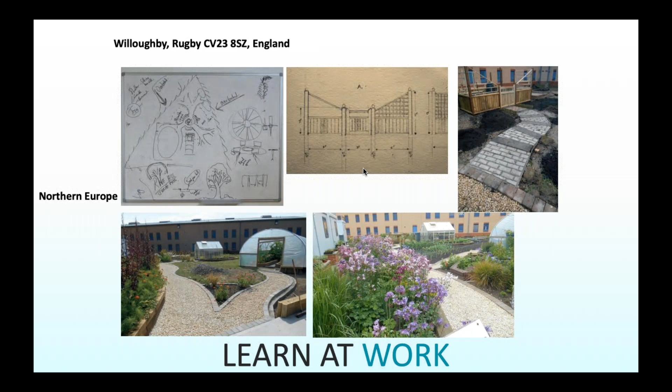Go ahead, Daniel, and I'll just pop in.

They do a lot of cultivation of plant material in East Asia, where it's a very open policy in many facilities—probably medium to minimum security, not maximum. They cultivate food and herbs and make products, engaging with the community. In Thailand, for instance, there's a shopping area open on weekends where trade objects, food, and beverages are sold, all run by inmates as part of a business acumen program, going soup to nuts to complete the entire program.

These are some examples of foreign projects, I believe in Northern Europe, though I'm not sure exactly which country. Do you remember which country this was, Amy? I do not.

Our project was at the Washington Correctional Center for Women, located in Gig Harbor, Washington, south of Seattle. The superintendent is Joe Wofford, and the facility has been around for about 50 years. It houses over 700 women offenders, with minimum, medium, and close custody or maximum areas within the prison.

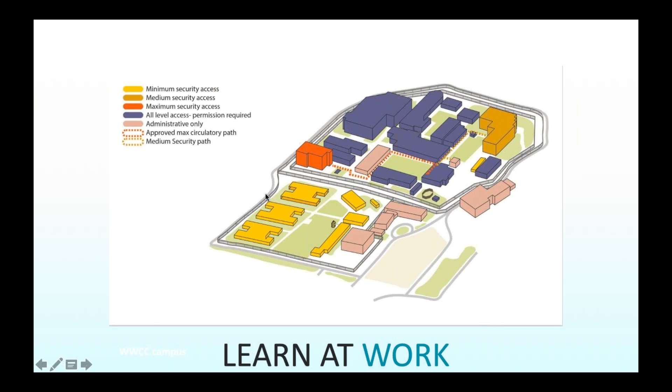And if I could add, in the minimum security access area, there's a mother-child unit as well, so young children can stay with their mothers—which is critically important for early development and attachment relationship building.

This breaks down based on use. This is the educational building, and this is semi-public. You enter the facility coming through the fence, and this is the visiting building—it's also the second checkpoint before you enter into the prison. The first checkpoint is right here, the initial entry into the complex.

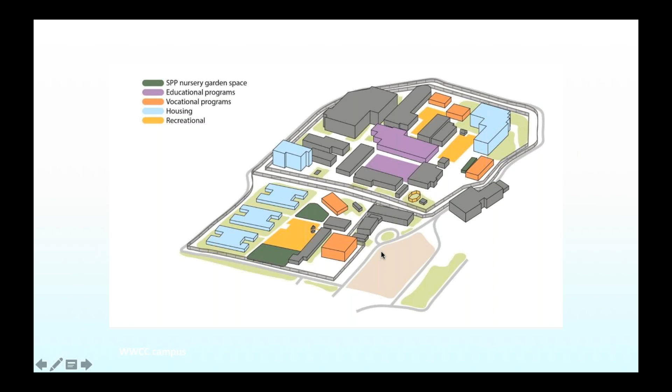This hopefully gives you a little bit of the reality of what's going on there. It was used for the presentation to the staff and the administration.

This is the minimum living area, relatively low buildings—there are six of them, slated to be renovated into two-story buildings, but right now they're one-story. It's pretty much like a dormitory, with bunk beds and shared spaces. You can't see it because it's wintertime, but all around the grounds they're growing food and propagating the plants I described earlier.

Down below is an area for staff—an interior space for breaks, and also an opportunity to use the outdoor space for respite, since their situation is highly stressed as well. Calming them and giving a sense of escape so they can rejuvenate their focus and attention was critical.

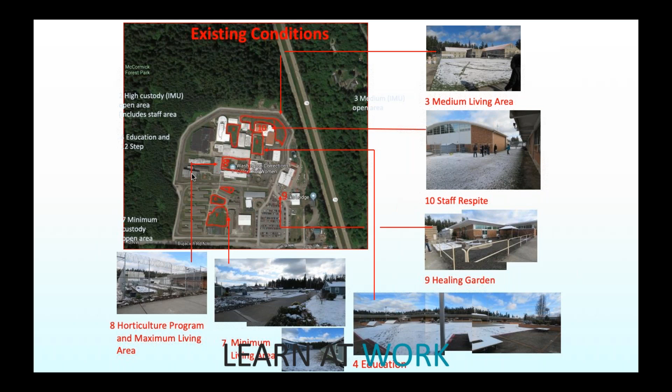As we talked about, there are a number of standout programs at the facility. One gaining traction at many correctional institutions is a prison pet partnership, sometimes based on agricultural animals, but oftentimes things like dog grooming—what a wonderful skill to learn, and certainly useful when one is on the outside.

Many prisons also offer the initial training for service animals. Other programs, as Daniel mentioned, include a very standout ornamental horticulture program, which provides amazing vocational skills for the women.

There's also a prairie conservation nursery where plants are cultivated and reused throughout the state. And again, the Sustainability in Prisons Project is a very important standout program at the campus.

As I mentioned, there is the residential parenting program. For many women, being in prison when their young children are on the outside is absolutely devastating. Having the opportunity for an offender to be with their young child and to learn really good parenting skills is paramount for the future of both the parent and the child.

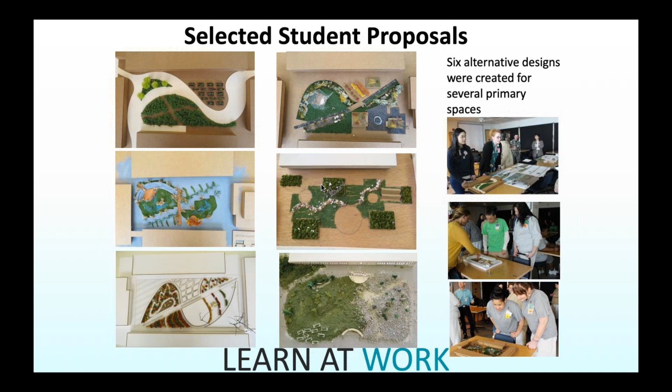So what we're going to do is go through and talk about a few of the designs, not all of them, just to give you a sense of the diversity and variety and how the students approached it. As Amy said, there were architects and landscape architects, so they were also bringing in principles of sustainable design, green building, and ecological healing.

This one is called Nature Adhesive, subtitled The Beauty in Brokenness. I don't know if you're familiar with kintsugi, an Asian concept, mainly in Japan but also spreading throughout Asia, where a piece of ceramics has been broken and reconfigured using a gold glue or adhesive. The idea is that the adhesive traces the wounds on the piece, but in doing so actually makes it more beautiful and also accepts the past of its trauma.

So it seemed extremely apt to a prison setting as a metaphor for what the offenders are going through. Many of them come from pretty challenging backgrounds, institutionalized and generational abuse, drug use, alcoholism, et cetera. When you talk to these people, they're the first trying to break that cycle. Others come from different backgrounds with other challenges, but all of them have been broken to some degree and are trying to repair. All of them are experiencing trauma, so the whole idea of healing and adhesive is so metaphorically apt.

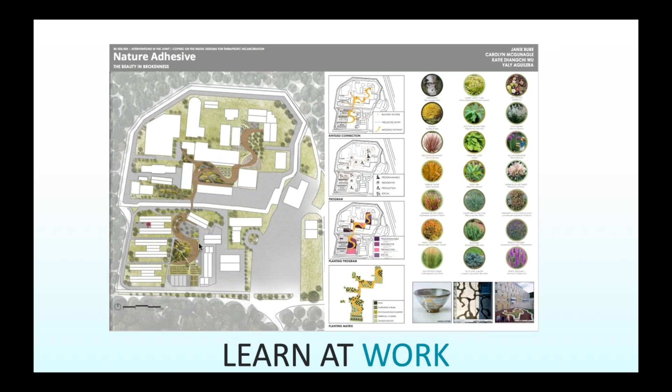So these are some details of what they did. It's a unifying paving that goes throughout, and then there are different garden rooms created. This is the large one with the education building here, so this would really be the learning garden. There are also some production gardens here, and the horticultural program is right here, which we'll be using as both display and learning areas.

This is the area for maximum security, so they have these weaving pathways. The idea is that for maximum, they have to use a certain pathway - for the most part, this brown pathway. But when a guard is there or they have the time, they could use this one, which would be a sensory pathway. So the idea is to have a hierarchy depending on time, security at that particular moment, and access to nature on a more intimate level.

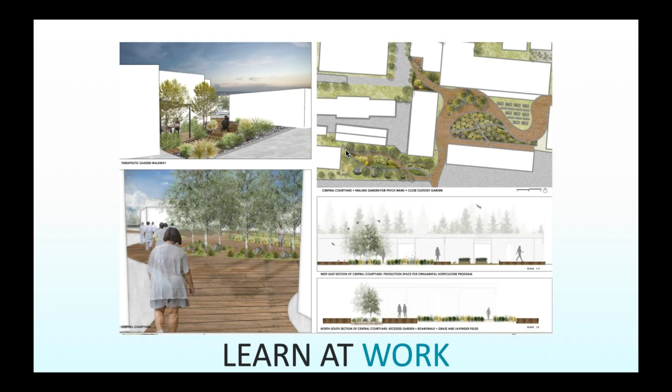So they cultivated their response based on the research they had done, and this is what really rang out to them. They also wanted to use art and art therapy in their proposal, so that was interwoven throughout all of their proposals for the different degrees of security.

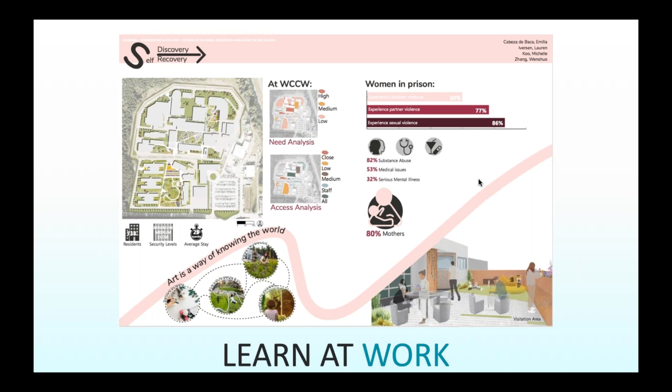What's really nice about this proposal is that they've labeled art, cut flowers, individual spaces, and social spaces, and then programmed each of the spaces. I'm not going to show you everything, but these are some examples of the individual spaces, social spaces, and art pieces spread throughout the campus. This is actually the staff area.

This team focused very much on that one as well. Again, you can see individual, group, public art—I don't know if they had cut flowers in that one or not. But they were able to program all the activities throughout it and then connect some of those to the curriculum within the facility that was operating at the time.

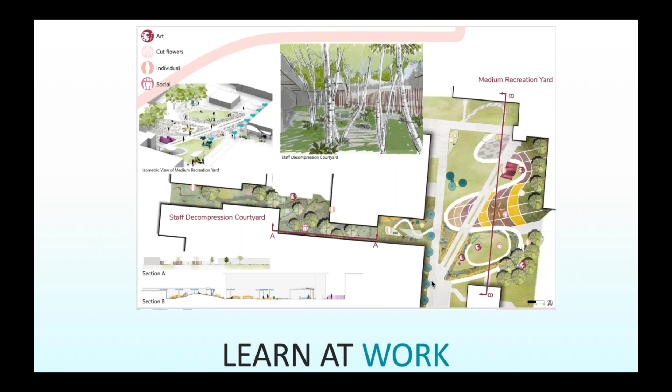This is the main courtyard again, and this was really perceived as the place for both education. I forgot to mention, there's also the 12-step program right here, so many of them cultivated a 12-step garden, which in this case is over here, along with propagation gardens, display gardens, and learning gardens.

Their idea was to use serpentine pathways. They felt it was a great counterpoint to the rectilinearity and ordering which defines a prison—you're told when to go, where to go, and how to go. The idea was that you would find yourself through this deviation from the regularity of the prison.

They also had this path, which connects the medium with the maximum and also connects to the dining hall. At certain times, certain members of the population may not be permitted to use this, so this would be the straight run that could be monitored more easily, and this would be the more sensory and discovery path.

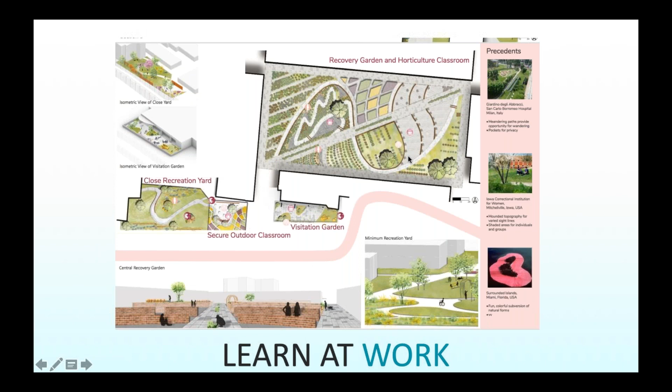This project looked at systems—natural systems, exercise as a system, social support as a system, and control, or self-control, as a system. They were looking at those layers and how to integrate them within their proposal.

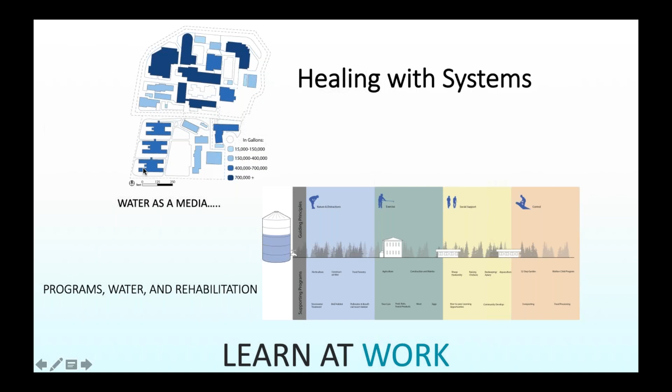One of the main systems they looked at was water. That's become an important part in the state of Washington, how we deal with water and water quality, and since this is a state institution, they're mandated to look at that. You can see they've done an analysis of all the water collected from the impervious areas, or at least the rooftops of the buildings, and that would inform how they'd deal with the water on the site.

This large courtyard becomes a detention, retention, and infiltration site for the water, as well as this lower one, which is the minimum. The idea was that water is valued as one of the highest therapeutic viewing opportunities and materials, plants being the other one. Water has both a powerful therapeutic value and a huge ecological value—it attracts a lot of wildlife and supports a whole range of pollinator plants. So it's really imbued in the ecological health, which is equated with human health in this facility.

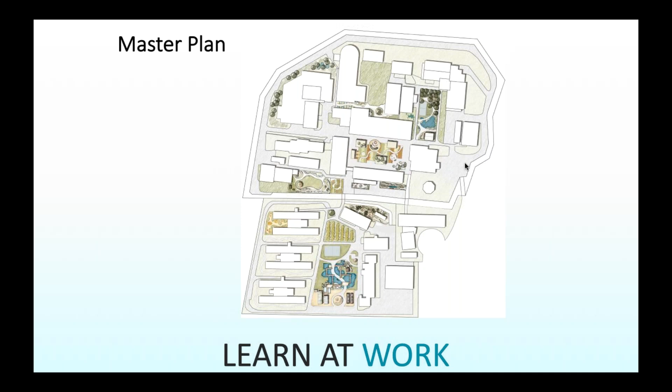I don't know if these are going to work. They did these little movies, which are kind of primitive, but give you a sense of what it's like to be there. This is the medium courtyard—part of it is a forest ecology and part of it is a wetland ecology, as well as a tennis court thrown in there for physical exercise.

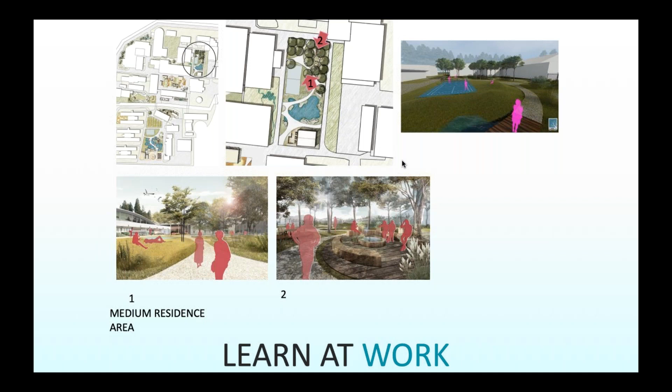So again, they had this program of the physical, the social, the ecological, and the control, and at certain times of the day you would have control of this environment.

This is the area for the staff. It's a long lineal corridor flanked by a number of buildings with constricted views, and they're trying to extend that with these boardwalks and gathering places. Here you can see somebody walking through it—it's a very, very difficult site.

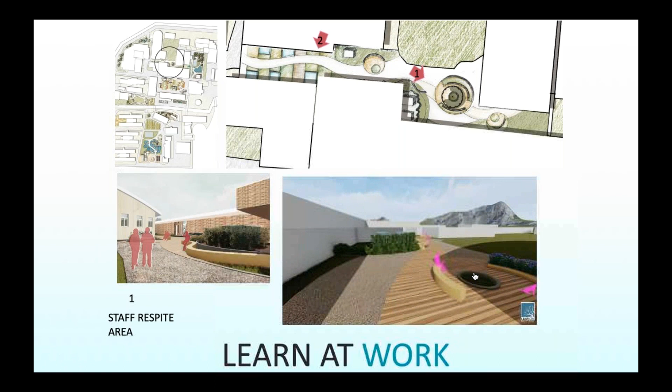It opens out to a yard on the right, which is the ball field for the entire facility, and they put some screening there. Again, it's rudimentary, but there's gathering space for staff to talk, and places for individual contemplation, meditation, or relaxing. There's a fire pit there as well, since they often eat lunch there—the idea was that they might be able to cook there too.

The value of having some type of decompression space for the correctional officers is critically important. Correctional fatigue is real, and it's really corrosive with regard to both mental and physical health in a correctional institution.

Unfortunately, and very frighteningly, suicide rates are very high amongst those working in the correctional system. So having a nature space for them is really important.

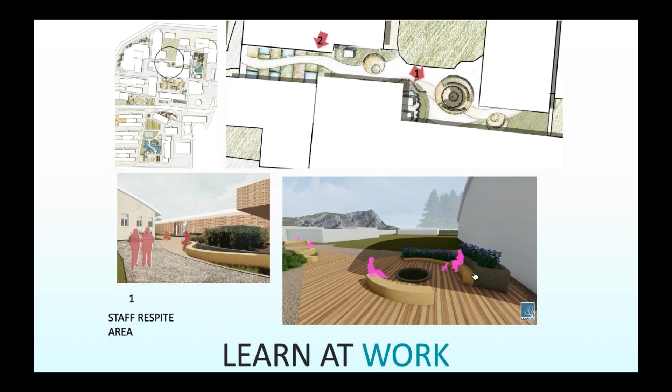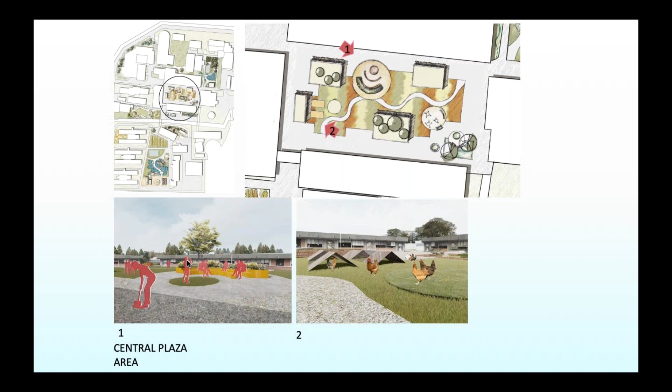Many teams did this, and to greater or lesser degrees, this became a focus of what they were doing. They brought the precedents and the chickens into the main courtyard, near the education building. They had chicken houses here, and cultivation and learning outdoor classrooms mixed within it, bringing ideas gleaned from these precedents and international examples.

This is the maximum security area. This would be the main controlled path, and this becomes a therapeutic garden that they can use during the time allocated or deemed appropriate by the correctional officers.

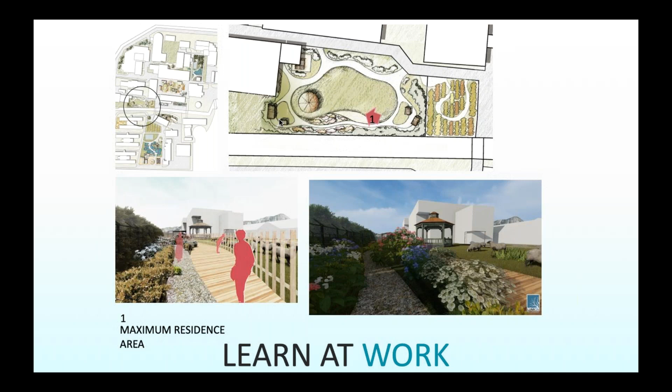They had a flock of sheep, similar to the goats mentioned before. This is twofold: one, it's for animal therapy for the inmates. Many of them have serious social challenges with humans but seem much more open toward a relationship with an animal. Also, the sheep would mow the lawn, so there's no increased maintenance burden for the facility staff and personnel, who are already taxed.

This is the area I showed you before that was encapsulated with chain link and razor wire, where they created the sensory garden. The idea is a few offenders would be in there for a given amount of time, in a decompression sensory input chamber, or garden, that they could use while being monitored by correctional officers or by cameras, which is generally what they use now.

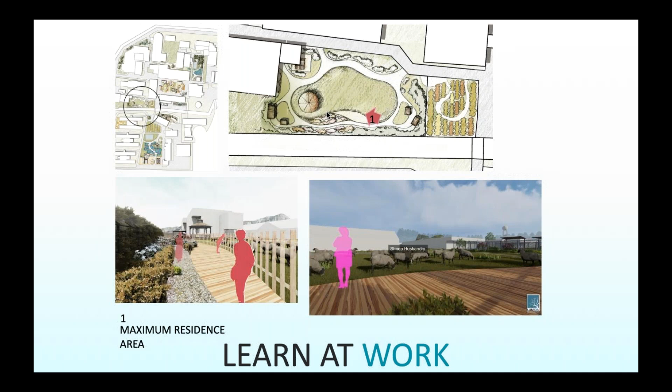There's more cameras and less direct CO observation. They also had quite a bit of water down here - this is a stormwater detention area, as I showed you before. They have boardwalks, with the idea of physical, visual, and tactile integration into this.

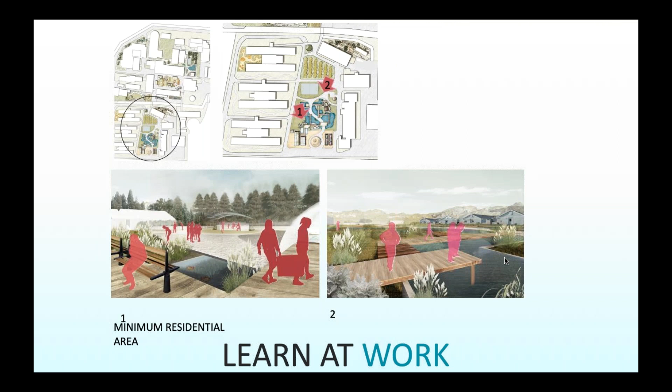For many residents of the facility, it's difficult to actually get away and dream. I would call this a dreamscape - it's water, plants, wildlife, sounds, and smells. It's really a place where you can remove yourself from where you are and restore yourself, restore your attention, restore your focus, so you can carry on in a better position afterwards.

Finally, this is ebb and flow, looking at the rhythmical patterns of coming and going, decline and regrowth, heavily embedded in an ecological approach to the campus. You can see they're taking the water and bringing it down to the minimum security area, creating this large and substantial water garden as the feature for that quad.

They were also using native prairie and meadow plants, grown on site, which reduces the water needs and maintenance needs of the facility. They perceive this as the human river that feeds into the water river and the water pond - it's all embedded in both the social and the ecological.

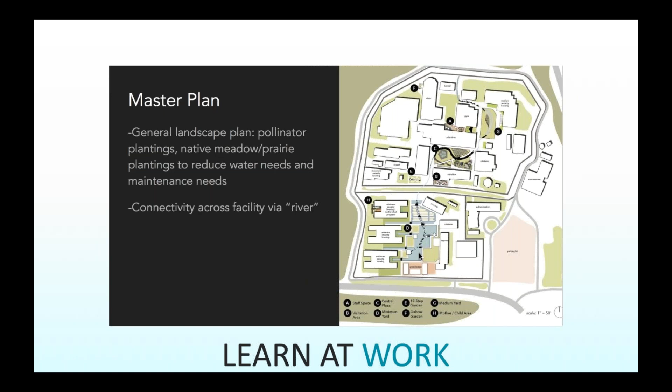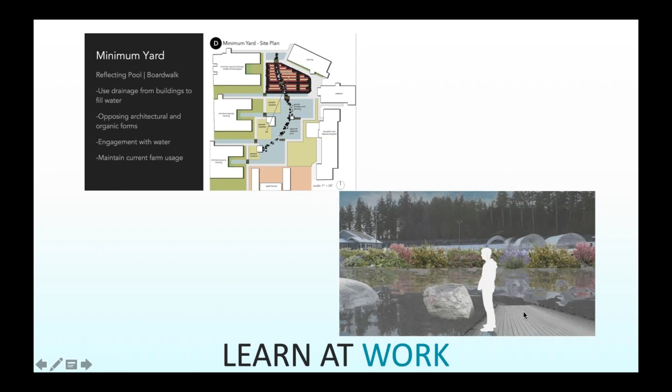You can see it's quite expansive. These are the sustainability prison project hoop houses in the background, and the rest is really a front yard of water. This is looking up at the Central Plaza where the education building is, and the 12-step program is over in this area.

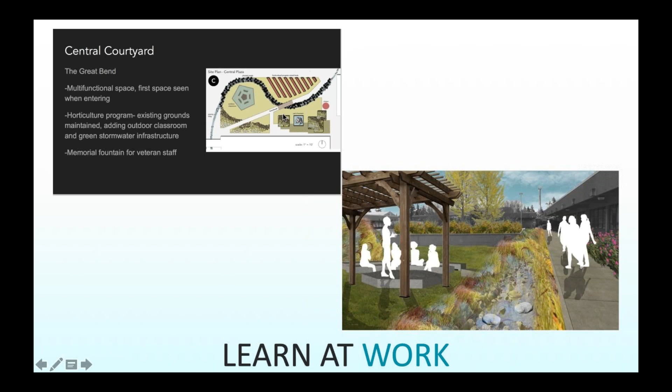The other thing is wandering - I've worked in a lot of psychiatric hospitals, and it's an offshoot of both mental illness and the medications given to treat it, causing an anxiety that results in aimless wandering and walking. So this would give a purposeful place for people to walk, interact with plants, and meditate, to hopefully regain some composure in times of high stress.

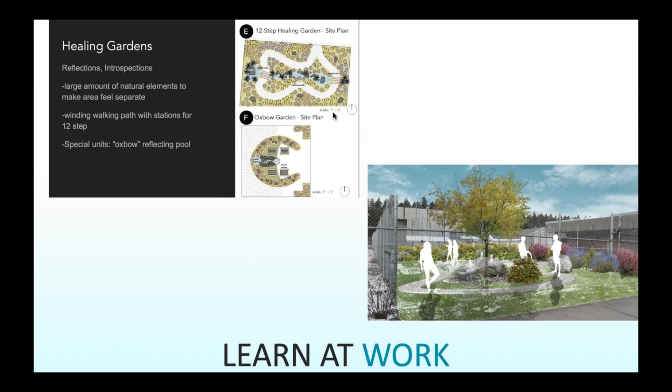So that's what a few groups did within the 8 weeks, roughly 7 weeks, allocated to the design of the master plan for the facility.

At the very end, because it was so difficult to get into the facility, we were able to get in with different students this time. We could bring a lot more students, almost all of the class, both those who had come on the visit and those who hadn't, because we never entered the primary part of the prison. This was in the first reception area, and we didn't actually have to go through security.

So this is a meeting room with all the high-powered people: the head of the COs, Deborah who is the superintendent, her staff, a psychiatrist, a sociologist, and many others were there for the students to present their work.

The reaction was incredibly favorable. I was kind of blown away by it. Deborah had talked about her life—I think she's from Arkansas—and how she had had a pretty tough life. She didn't go into details, but she did say that in those situations she also turned to nature, and that was where she found solace. So it really resonated with her that that was the approach we were taking.